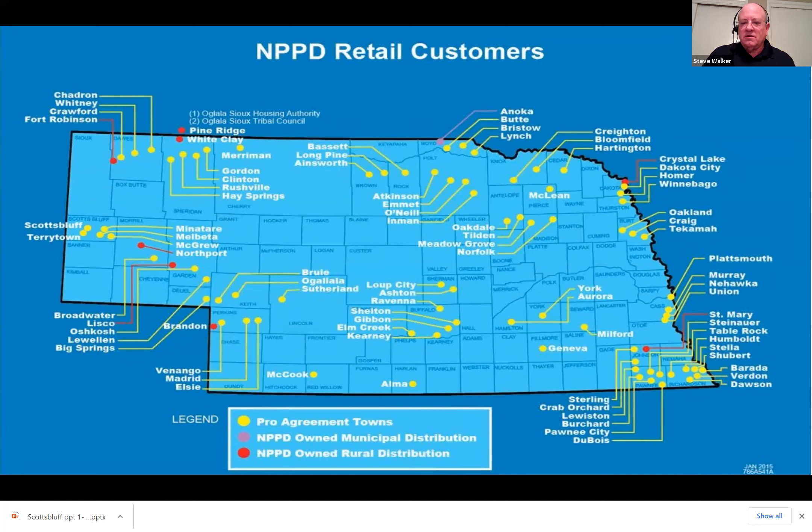So we consider that also very important that we have low rates, which means better costs for our customers, which helps them meet their power bills. And also, because we're public power, it means that you have local control of us. You actually get to vote for the board of directors that govern our business. Lots of times during election time, there'll be board members whose terms come to an end and they have to rerun. And that's when you get to vote for the board members that govern our business. Next slide, please.

Okay, this is where we're going to get into energy audits. Hopefully, I'll be able to share with you what takes place in an audit and what to look for in some areas of your home to kind of nail down, well, what's really using energy in my home and maybe why, because the why is also very important.

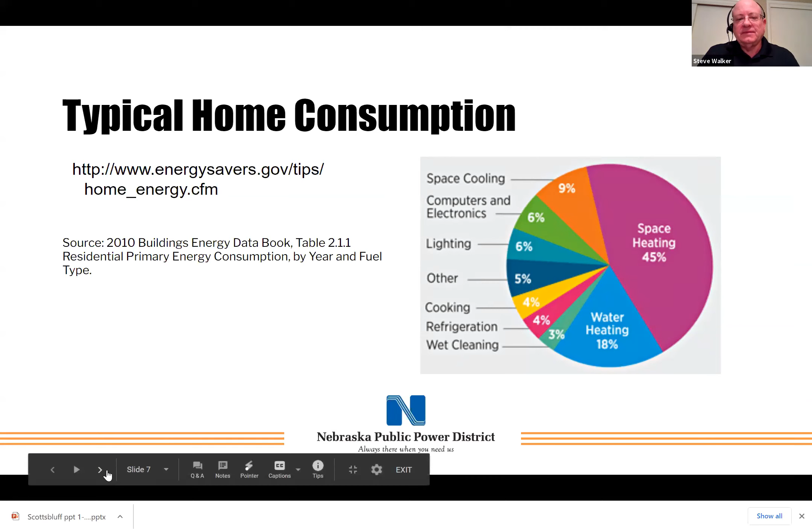Okay, what we offer for our customers, and this is really a unique tool that we have, is found at nppd.com, our website. It's located under the Save Money tab, and it may not pop up complete. You got to kind of dig down into it. You hit Save Money, and then you click on Tools and Resources, and then it'll open up a tab where you can complete a home energy audit. And it has two methods that you can go through.

One is a very simplified method that mainly gives you pictures of what it's talking about, and it will do a lot of the calculations behind the scene for you. Or you can go into what's called the advanced home, and it'll ask you more questions about your home as you go from tab to tab in it, which will give you a better analysis for your home when it's done. And you can then hit analyze or complete, and it will give you a summary and give you suggestions of what you might choose to improve in your home.

And the beauty about this is you can go back in and actually make the changes on your home from the information and do another analysis on it and see the changes of what benefits would have. Like maybe if you change the insulation level in your attic, or you improve the windows, how much energy might be saved. So it's a pretty powerful tool.

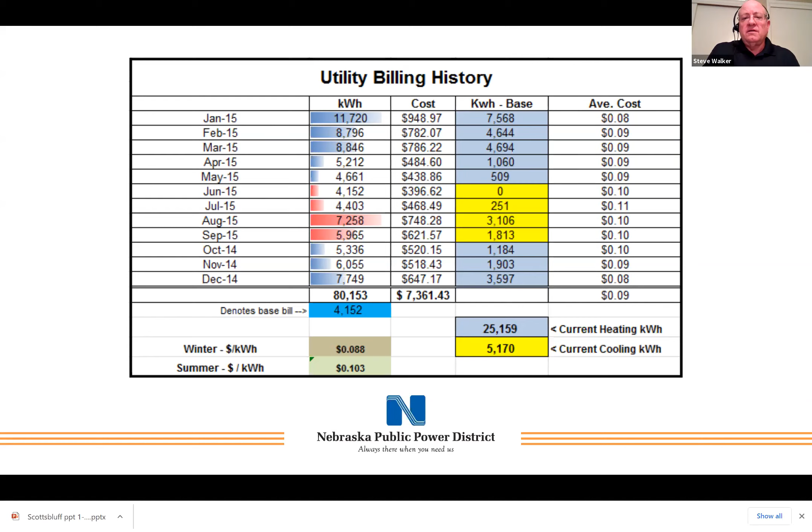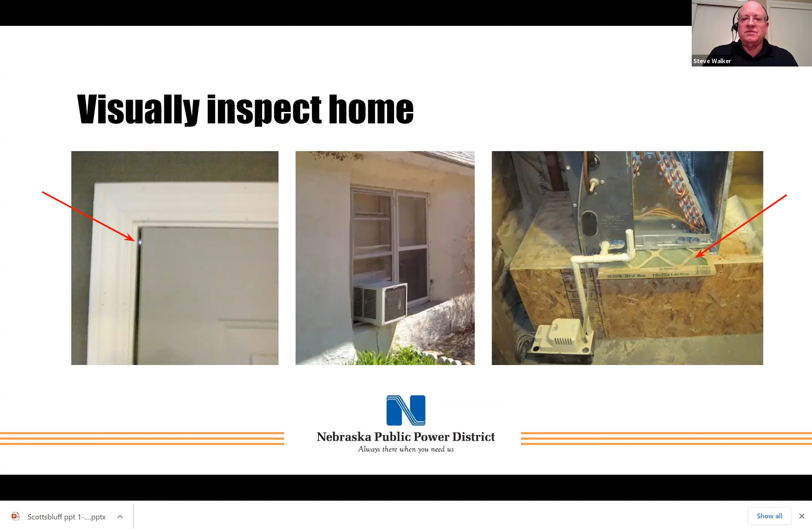So heating and cooling costs aren't always associated with the heating and cooling system. It can be what we call the building envelope. And that means the walls, the roof, the basement or crawl space, the doors, windows, and all of that comes into play. Those are items that can make our heating and cooling system work harder and use more energy. And then the right type of heating and cooling systems.

The middle picture there is a window air conditioner, and it will let a lot of outside energy in through that unit. It doesn't have much in the way of restriction from air movement. And even if it's running, it can bring outside air in and compete with its ability to cool the inside part of that room. Plus, a lot of times they're not sealed tightly. So the type of heating system and cooling system can make a difference.

The other picture there is actually a central heating and cooling system, and there's a couple of things wrong there. For one, the filter is sticking out of the filter compartment. If that's happening, it is letting air bypass that filter and get up into the coils, which can bring dust and dirt into the coils and plug it. That actually needs to be closed and sealed. And if it isn't, that will allow those coils to get dirty really fast and increase the energy usage of the system.

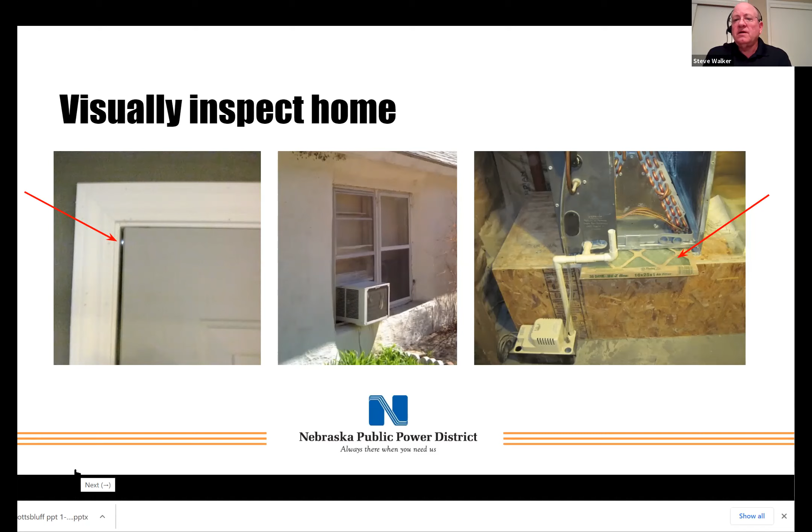Okay, here are some energy saving things that I have found on audits, and this was all at one location. They had a lot of things going on. A flag light was on 24/7, and that wasn't a 60-watt bulb. That was like a 125-watt flood. The bug lights weren't zapping many bugs, and there were basically two of them there, on 24/7. So during the day, if it wasn't swatting bugs, it could have been shut off.

It had a 20 kW electric furnace, which is a lot of load. The electric furnace uses a lot of energy, and there are higher efficiency heating systems today called heat pumps, both air source heat pumps and geothermal heat pumps, that use a lot less energy to do the same job. So just upgrading the heating system for this home could save a lot of energy. There was a 50-gallon electric water heater in this house that had plumbing issues that restricted flow of water. And the pipes weren't insulated, which meant the heat was coming off the top of the water heater, things like that.

15 4-foot T12 fluorescent lights. That's a fairly high number for a residential for using fluorescents, but today, and at that time when I did this audit, the recommendation was to install LEDs. LED lights will use quite a bit less energy, and we'll cover that a little more in another slide.

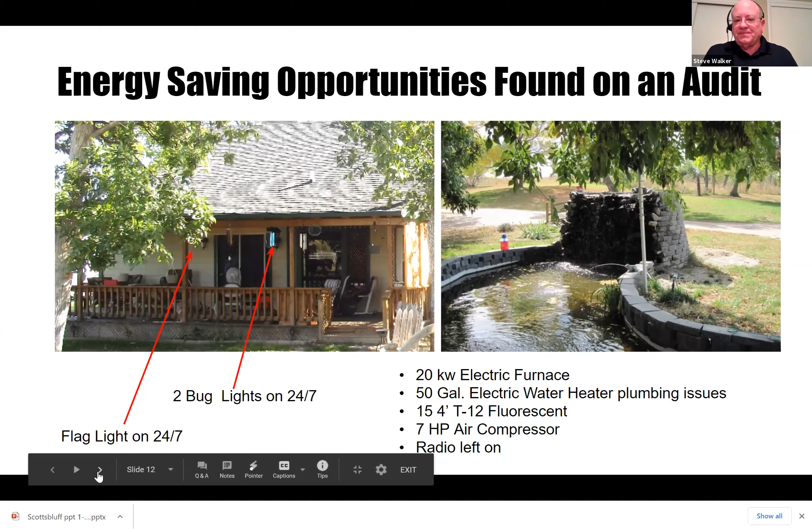Okay, building structure improvements, getting back to what I was talking about, the building envelope. It really makes a lot of sense to spend some time looking at the walls and ceilings, the attic insulation, and improvements in there do save energy. The minimum insulation level now, starting last year, the state of Nebraska adopted the 2018 building codes. We hadn't adopted new building codes. Oh gosh, we were on the 2009 building code.

And so when that changed, that level went from R38 to R49, which is approximately 16 inches. We used to say around 12 inches. So there's more opportunity to insulate attics. You might want to think about maybe increasing the insulation in your attic just a little bit more.

Caulking around windows and doors on the outside can really reduce some of those drafts that come in. Caulking tends to crack and open up over time, and it's a very cost-effective improvement. That's usually a low-cost suggestion.

Another low-cost suggestion is putting outlet gaskets and switch plate gaskets behind the outlet plate and switch plate. It can be easily done. You just turn the power off, take the plate off, put these gaskets behind it, and put the plate back on, and you've got a nice seal around your outlet, which can stop drafts on the walls that face the outside of your home.

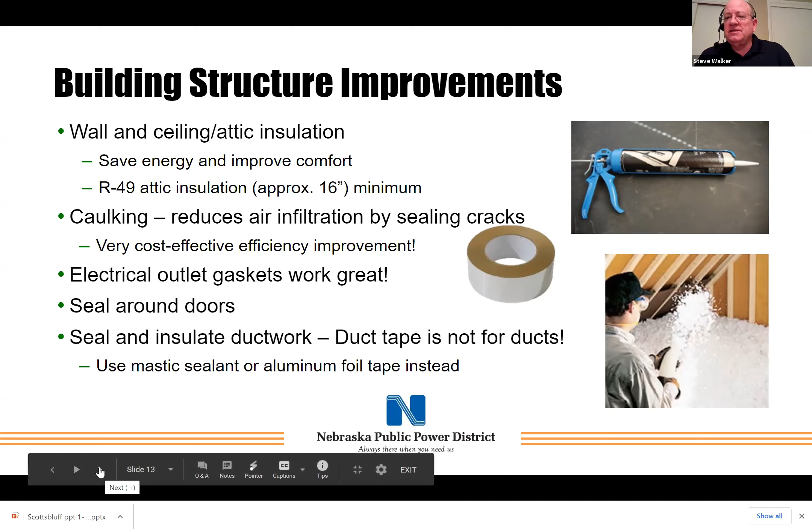Okay, lighting. LEDs are here and they're coming down in price every day, and they use a lot less energy and they last up to 3 times longer or even more depending on the quality of bulb you buy. They work better in dimming applications than the old CFLs did, and they contain no mercury. Replacing the 15 inefficient bulbs can save your house over $50 a year. And that just is a testament to how efficient they really are.

Replacing with Energy Star qualified bulbs just means you're getting a good buy for your money. They have been tested and certified to do what it says on the package. And another thing you might consider are occupancy sensors for the areas with intermittent use, where you go in, turn the light on, then you walk out and you might forget to turn the light off. It might be something to consider. It's just another way to save energy. Next slide, please.

Water heating. The big thing here is watch the temperature setting on your water heater. I have been into homes where I've tested water temperature, and I've measured over 140, up to 160 degrees Fahrenheit. And the factory or industry standard is 120 degrees Fahrenheit to set your temperature at. That's good for safety and energy efficiency. Anything higher than that just really makes your water heater work hard.

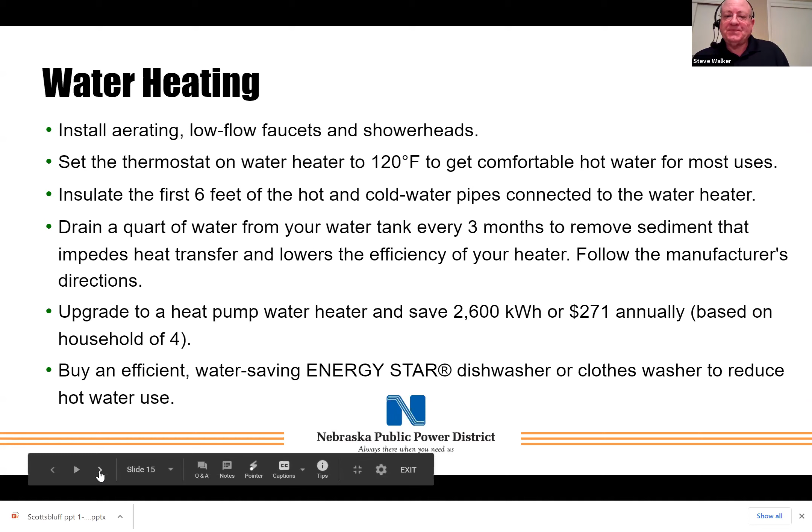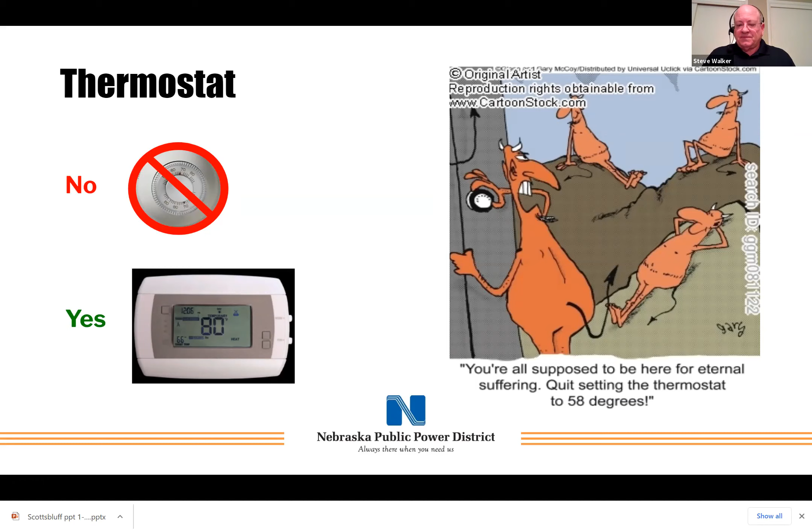We'll go to the next slide because this is still thermostats. If you have a heat pump in your home, you may not want to move your thermostat more than 2 degrees, because if you move it more than 2 degrees in the heating season, it will call on electric resistive strips, which is a more expensive way of heating your home and will increase your energy use.

Excuse me, I got it backwards. Set your thermostat as high as possible in the summer to where you can be comfortable, and as low as possible in the winter to be comfortable. The suggested thermostat settings are 78 in summer and 70 in the winter. And if you can, use a programmable thermostat and set a daily program to what you'd like your temperatures to be during the day and evening.

And you can use a setback schedule too, and that will save you up to 10 to 15% on your energy costs. Some setback schedules really do work. During the summer months, adjust the temperature by 1 degree increments and find out where that level is. Don't adjust it with large swings. And during the winter months, again, 1 degree at a time, and find that comfortable spot. It can translate into energy savings as well.

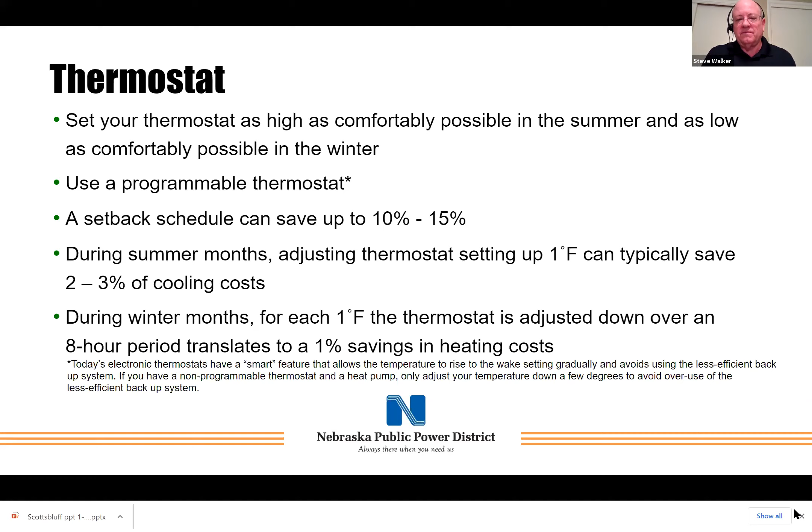Cooling system maintenance. And this also goes for a heating system. But as you'll see later on, we do have an incentive for the cooling system tune-up, which includes air conditioners and heat pumps. And we'll talk about that a couple more slides down. But it's important to keep those coils clean and make sure they're charged properly and to make sure any filters in the system are clean.

And so it's important maybe to even have a technician come out, and we suggest once every 3 years, but some people choose to have it done every year, to have a technician come out and go through and just make sure everything's working. Again, if you go back to that pie chart, it's 45% of your energy, and it really does make an impact on your energy bill to keep those units operating properly.

And there's one thing we like to call attention to. There's an evergreen cover that comes up for sale about every year when it comes into the air conditioning season. And they like to sell these things to cover the air conditioner. Well, those things block the air going around the unit and can really increase the energy use because it can't get the air to move around the unit that it needs to make those temperature changes through the airflow through the unit. So very important. Don't try to beautify it. Make sure that your outside unit is free and open and can circulate air around it.

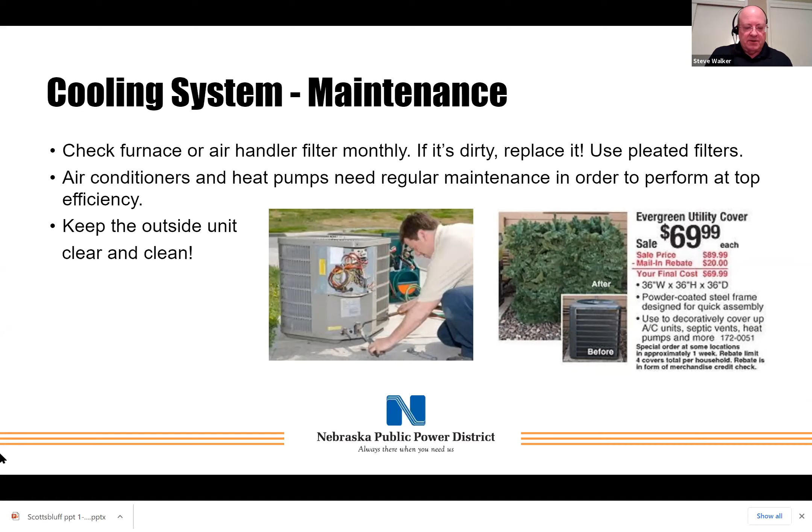Okay. When to replace windows. And this is kind of a pet peeve of mine, in that window salesmen will try to sell you windows because it will save energy. And they really over exaggerate the energy savings that you can get by window changes. There are times to change windows. And some of those times are if you're feeling a lot of air around the window, even when it's closed.

But again, there's another part of that window that you don't get to see. Behind the molding around the windows, there is a wood framing that is holding that window into place. And it may or may not have insulation around it to stop the air leaks that would come from the outside. And I have found this to be a case in many older homes. And the other thing is sometimes they will try to stuff fiberglass insulation into the gaps and the cracks in that framing. And when fiberglass is compressed or pushed in, it just becomes a filter. It still lets air through it.

The proper insulating medium is actually what we call low expanding window and door foam that you can spray in the cracks. And it's not the Great Stuff that is high expanding. So the low expanding window and door foam won't make your window go out of square or make it hard to open and close. And that will seal the leaks. And again, it can be a struggle to pull a molding off to check that, but sometimes that's all that needs to be done instead of replacing windows.

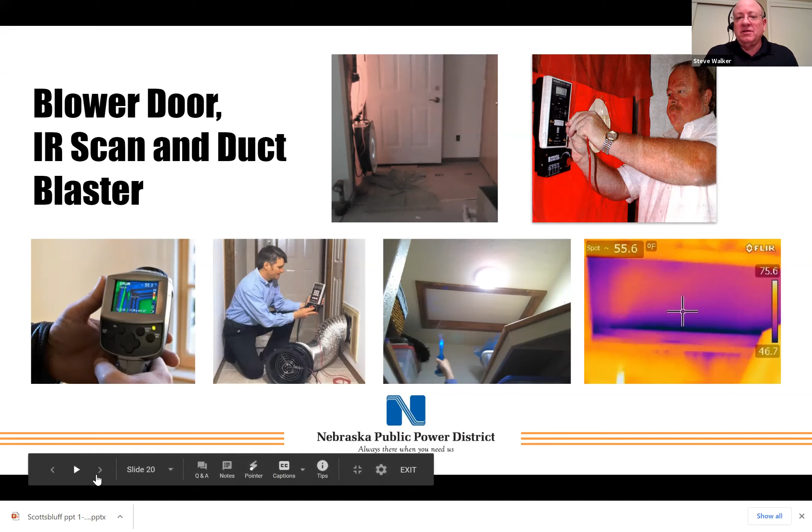I'm going to move into some of the incentives that we have for our customers. Again, if you're an NPPD customer or a wholesale customer of NPPD through another power company, one of the closest power districts that we have out that way would probably be Custer Public Power in Custer County. Entities like that do offer our incentives, but just contact your local power provider and they would be able to tell you if they're participating or not.

We have residential incentives for high efficiency heat pumps. And if you didn't want the direct incentive, you can actually go through the Nebraska Energy Office, and we have bought their energy loan for buying heating and cooling systems down to a lower percentage. I believe it's in the 1.5% to 2.5% range at this time. That might be something you would like to check into. We have a cooling system tune-up. That's where we give you $30 back to have your heating and cooling system tuned up. And again, you need to have either a central air conditioner or a heat pump to have this done.

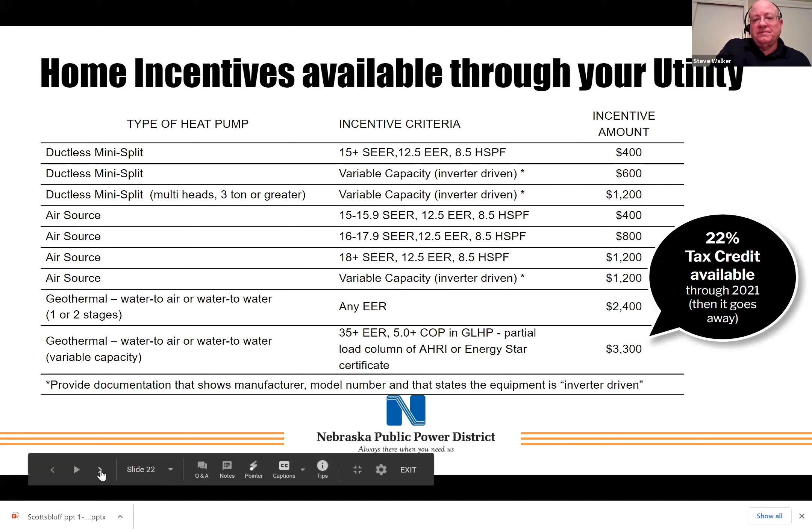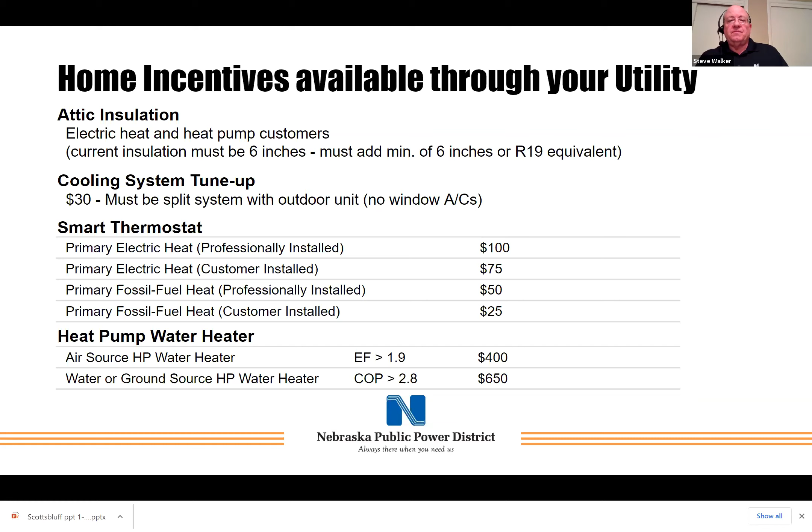Okay, this is the attic insulation. We've talked about the cooling system, and these are the amounts for the smart thermostat. Professionally installed primary system electric heat, it's $100, $75 if you put it in yourself, and then the fossil fuels are $50 and $25 respectively there. The heat pump water heater and air source is $400. And if it's a geothermal standalone unit, it's $650. Next slide, please.

Okay, getting into solar, which is becoming very popular. A lot of people are very interested in that. You'll see solar arrays on a lot of the farmsteads, maybe even some of the homes around your community. Very visible in Scottsbluff. At our office, we have a small solar farm and another solar farm located out a ways.

But again, that's called community solar. That's like at our office. And what happens there is you actually buy shares, and for each share you buy, which costs about $1.08 a share, you get 150 kilowatt hours. And the idea behind that is you get the benefit of not having to put it on your house. You get the benefit of not maintaining the systems.

And it takes advantage of economies of scale, which means the power produced from that can be at a lower cost than on an individual system. And many systems, if you're putting them in yourself, require a pretty good size upfront investment to cover the cost of installation. Things have to be changed for your electrical system, and not only just the mounting of the systems.

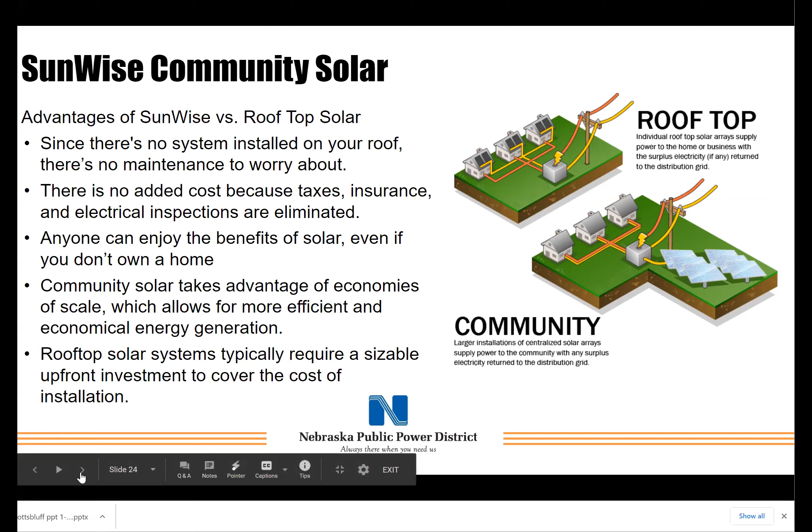All right, thank you. Okay. See if there's anything else real quick. And feel free to ask questions. I should have said that at the beginning. And I don't see anything else right now, but if we get anything else, I'll just wait for a pause and then tell you the question. Okay. Next slide, please. All right. I think I'm still on the same slide.

Okay. We're going to turn to electric vehicles. Another thing that's become a lot more popular in the last couple years. And part of the hindrance to electric vehicles is the availability of charging stations throughout the state. On the eastern side of the state, there tends to be a lot more charging stations, so it's a lot more convenient to actually be able to charge a vehicle.

Out in the western part of the state, there are fewer and fewer, and most people rely on their home charging station to charge their electric vehicles, which means that they may not have the ability, if they drive a fair distance, to be able to recharge their vehicle, which can be a hindrance to the use of an electric vehicle. But the ranges are increasing.

I know Nebraska Public Power actually owns a Bolt, and the range on that is almost 250 miles, which means you can get a fair distance away from home and get back safely. And some of the other electric vehicles, the Teslas and things, may have an even larger range. But again, you still have to take into consideration where you're going and whether there are chargers available. It can be a challenge.

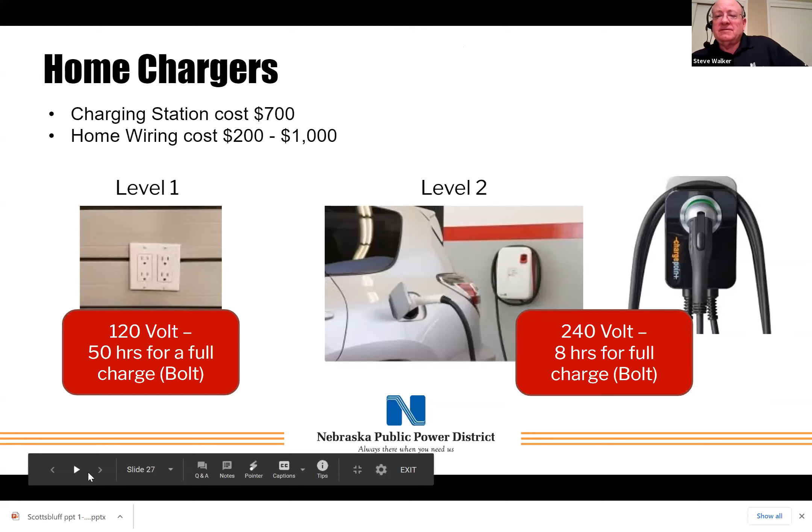And we have a $200 to $400 pre-wiring incentive. You can pre-wire the home and not buy the charger yet and still qualify for that incentive as long as it's pre-wired for an electric vehicle. It's kind of to help our homeowners plan for their future.

Some of the funds are from the Nebraska Environmental Trust, especially the purchase of the EV. And these are available now in 2021, so something you may want to take advantage of. Next slide, please.